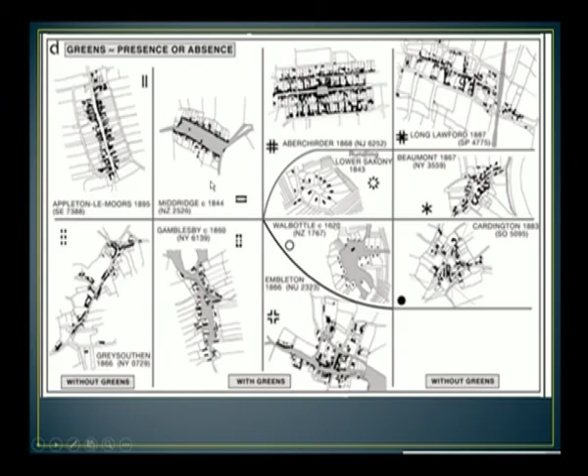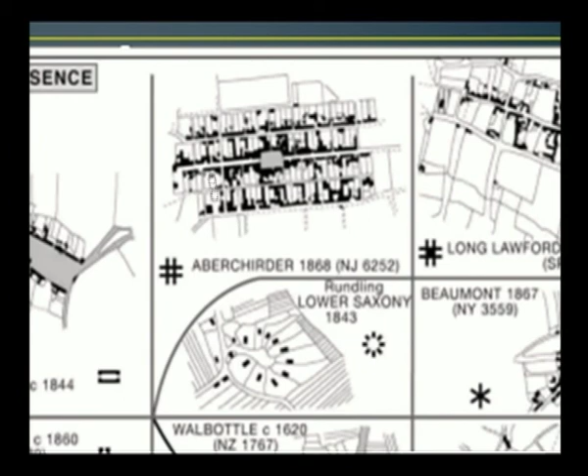Here you have the importance of greenery. This town, like you see over here, the lack of greenery is obvious. There is only the towns and the road. Here in Middridge, it is just the opposite. The presence of a green belt is what makes the town possible. Here again you see the very small presence of a green belt, but otherwise the town has completely proliferated. Again, absence of a green space, absence of a green space.

So, greenery actually started becoming an element of a village, and towns recognized that we do not have to have much of a belt. So, again over here you have few elements and towns that have grown with a lot of greenery. Walbottle, Gamblesby and Greysouthen, again with no speck of greenery at all. So, you had two concepts of towns that emerged, with greenery and without greenery, and what they felt was the ones without greenery would aim to grow towards a larger town with greater expansion. But what they failed to understand is that it is because of the green belt and the whole element of greenery or water attached to that town that the town prospered.

So, what actually happened was this was completely an organic process of change. No one woke up one day and decided, okay, let us move in this direction, let us move in that direction. These were all changes that were made by the community, and most of these were rural reorganization. Where there was more greenery, it was obviously more agriculture oriented, versus the non-green towns could be service oriented or tradesman oriented towns. So, most analysis of settlement types and patterns has been morphological, that is, it has changed over a period of time, it has not emerged overnight.

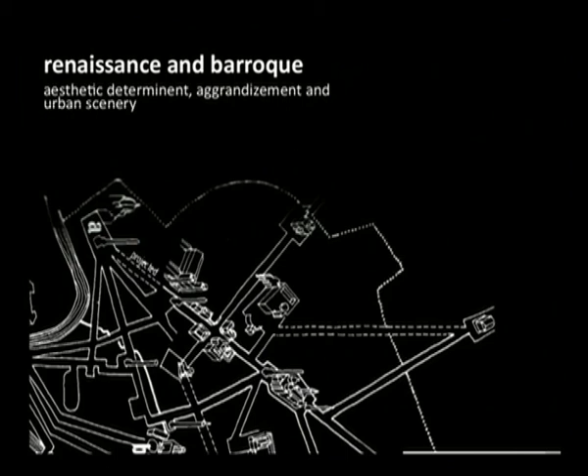Now we move on to Renaissance settlements. So what are the new elements that came about in Renaissance and Baroque? Aesthetic determinants, aggrandizements, and urban scenery. So these are the three elements that were brought about. Aesthetic determination is new humanism ideas, that is, they started having elements just for the sake of having elements. It did not have to have a purpose. It was meant to appreciate beauty.

So the Renaissance was basically a cultural movement that happened right after the Dark Ages, roughly from the 14th to 17th century. It began in Florence in the late Middle Ages. That is, as the Dark Ages was coming to a conclusion, the Renaissance movement began in Florence, Italy, and then it spread to the rest of Europe.

This term cannot be directly used because the Renaissance took over in different parts of Europe at different times. That's why it's from the 14th century to the 17th century, and this term covers all those time periods. So if you look at it as a cultural movement, it was a resurgence of learning. That is, when people refused to believe the feudal lords just at face value. They wanted to understand their religion, understand culture, and question why everything was happening.

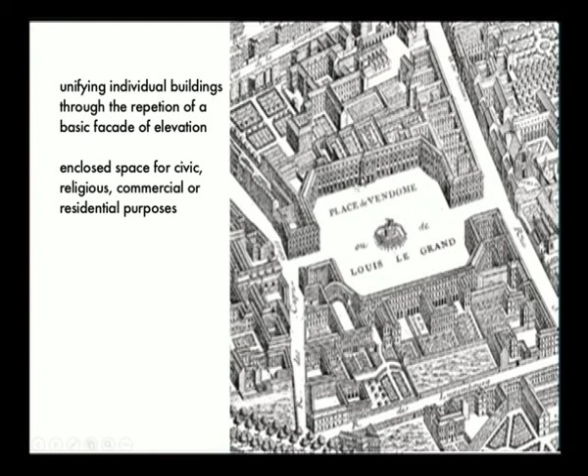You can see the difference between a medieval settlement and a Renaissance settlement. It's more organized, more neat, clearly laid out and well defined, and nothing is left to organic chance or nature's chance. You have unifying buildings. This is the main plaza, and you can see a network of buildings that has formed, a roadway for horse carts, pathways for pedestrians. It was clearly demarcated and enclosed spaces were made. No more were places open. The open spaces were themselves enclosed, so there was a sense of security and guarding.

Cannon-proof geometries. This was the next important development that happened. In the Renaissance stage, like we just mentioned, there were wars, there were a lot of revolutions, and as time progressed, there were new kinds of weapons. It was no more bows and arrows. They had cannons, they had cannonballs.

So they started having new senses of geometry to protect themselves, as well as to make sure there were watchtowers to watch out for enemies who were coming. So this kind of geometry emerged in most urban planners, town planning, and most of the villages had fortifications resembling this shape because you could protect the inner building.

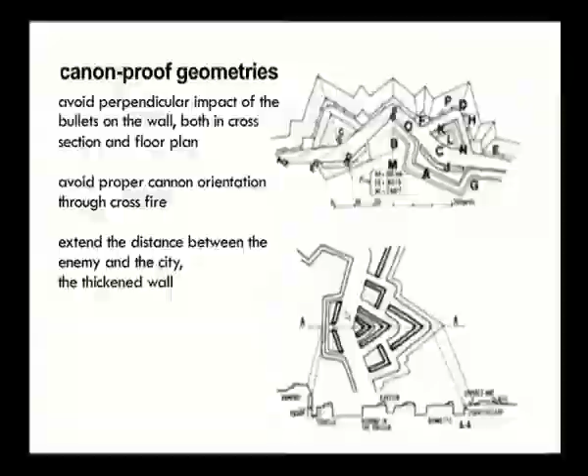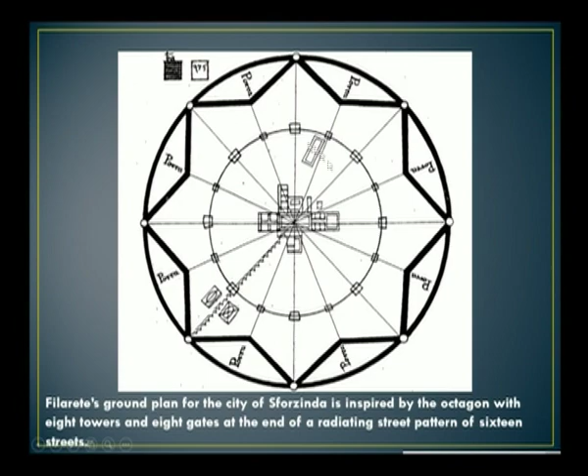These are ideal cities of Renaissance time that came about with a defense wall. Defense was given a lot of importance. This was all that happened in Italy. You have the La Sforzinda by Filarete. Filarete was a very important architect or urban planner at that point of time. Those titles didn't particularly exist at that point of time.

You have Giovanni of Verona who came up with a couple of them, but you can see what is a common factor amongst all these plans. It is the sense of strict geometry. You had the access points defined. Octagon and hexagon played a very important role, and they were all radially situated, and if not radially situated, outwards they were octagon, so they can be linear in the center. So these were the typical plans of various Renaissance towns that was propagated to make sure all the palaces and forts could be protected.

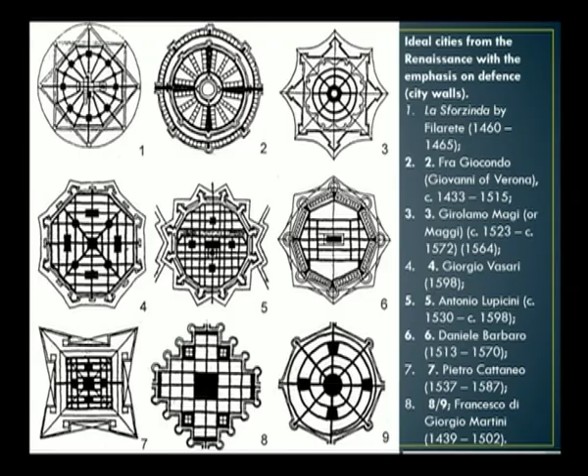So it was during this period that architects began to systematically study the shaping of an urban space. How is it that an urban space comes into being, and not just as a building itself, but the entire city was given the status of a piece of architecture. So it has to be functioning well, it has to be aesthetically pleasing, it has to have great public spaces.

Italian cities date from this era, most of the old Italian cities, and they were rebuilt to create elegant squares, long street vistas and symmetrical building arrangements. So once aesthetics and functionality came into being, a town got a new form by itself. And responding to the advances in firearms during the 15th century, new city walls were designed with large earthworks to deflect artillery and star-shaped points to provide defenders with sweeping lines of fire.

You have the Spanish colonial cities in the New World which were built according to rules. So there were particular rules that were made. This is called the Laws of the Indies, 1573, which specifies the orderly grid of streets with a central plaza, what kind of defensive wall is required, so that there is a uniform building style emerging.

Now if you look at the features of a Renaissance style, a new style of fortification of earthwork, bastions and artillery resistant wall developed. So it was very important that warfare had to be given importance. Yes, aesthetics was given importance, but functionality was also very crucial. Vast open spaces were left in the center of towns for community activities, but it was within the fortification. The open spaces could also be guarded. Great emphasis on elevation treatment of building roads can be seen.